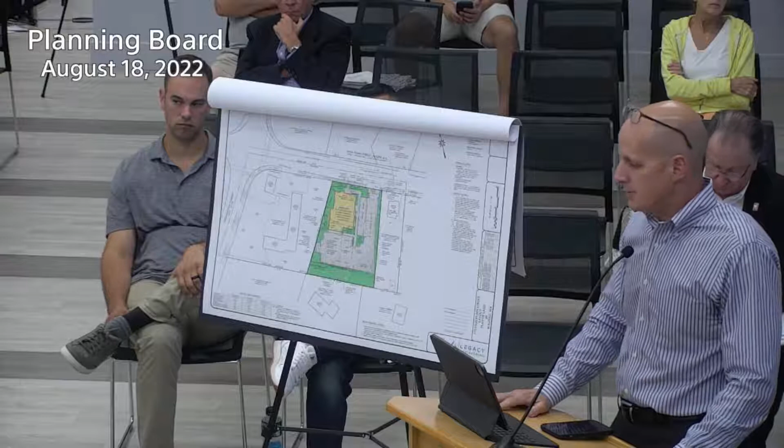Since we were last with you, the applicant has been working back and forth with not only the town engineer but the zoning board of appeals with respect to the special permit to allow 2 floors of residential above. The project has been reduced in scope—it's gone from 10 units down to 8 units, one of which will be an affordable unit.

So the footprint of the building is smaller, the amount of parking is less, and the amount of impervious coverage is reduced. We're down to 25 parking spaces. The general configuration is the same. The big changes we made here were in this corner, for the fire department.

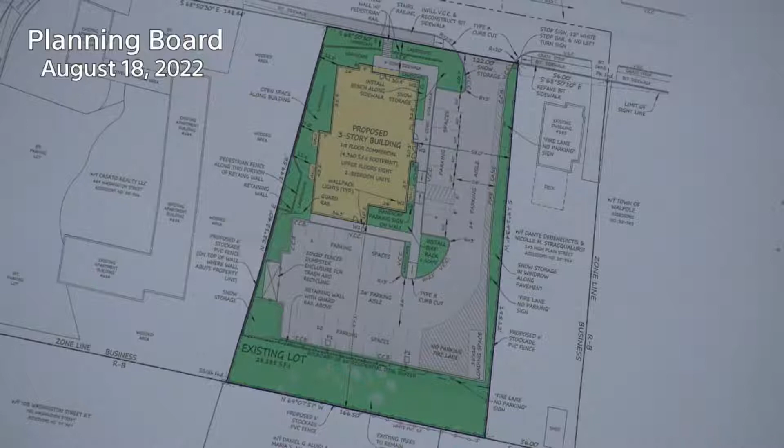We opened this corner up. We have a designated loading space so vehicles coming in for deliveries—Amazon, UPS, whatever—will have ample room in this corner to park and bring their deliveries into the building. There's also room here for a trash truck to turn around, an ambulance to turn around, a police car to turn around, and that was all worked out with the deputy fire chief.

The other changes we made were relative to landscaping. There's been a slight reconfiguration of the area back here, but there's been a significant improvement to our proposed landscaping. These are all green giant arborvitaes, 6 feet on center, with an installation height of 9 to 10 feet. That was specifically requested by the abutter to the rear.

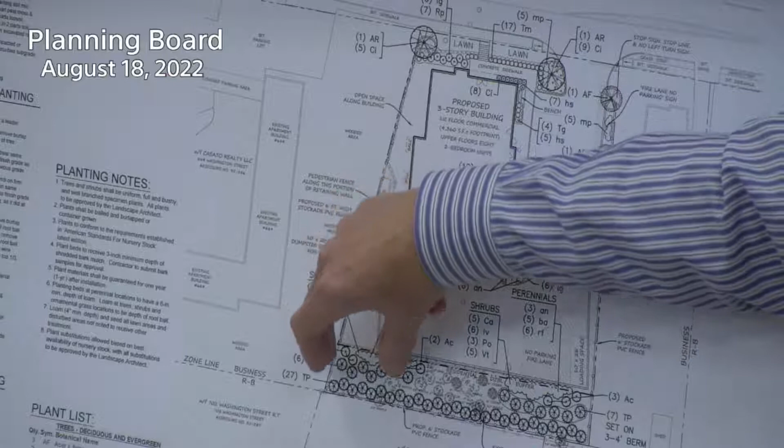There's a whole row here with a group of deciduous trees in the middle, and in the outer areas where we don't have a lot of existing trees, we have a second row of these. We're looking to improve the 26-foot buffer pretty significantly. We've done a number of projects like this, and these really grow in tall and thick, providing a very effective screen.

Everything else was really technical stuff. A couple things we discussed with the town engineer—we would repave the walkway, the sidewalk in front of the property and a little bit beyond. There's a notation about the no left turn.

We did submit to you a traffic study, even though it's not required for this project because it generates too few trips, but the zoning board asked for it. So we did it and provided it to you—the traffic consultant is here if you have any questions. The takeaway is we're not generating a lot of traffic, we have ample sight distance, and we won't have any impact of substance on traffic flows in the area.

The question came up about the no left turn. What we worked out with the zoning board and the town engineer was a note on the plan that calls for a no left turn during specific hours—basically peak morning hours and peak afternoon hours.

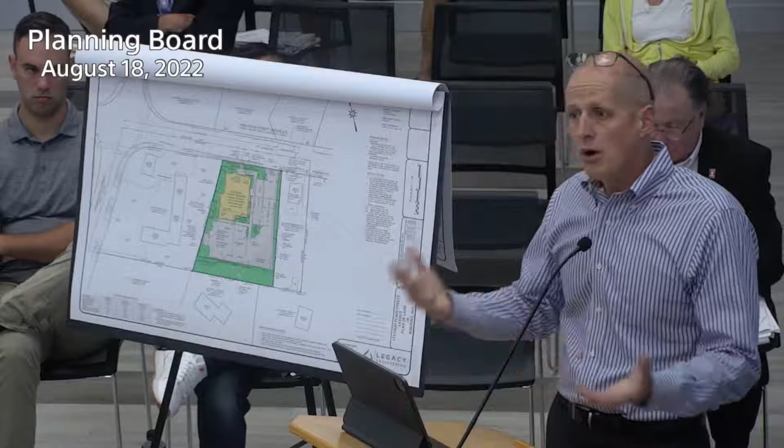There's a subsequent note indicating that those hours can be changed with the consent of the police department and the town engineer. So if they need more, they could do that, and if they decide they don't need it, they could also do that. That would be something town staff can observe after construction and make a decision about.

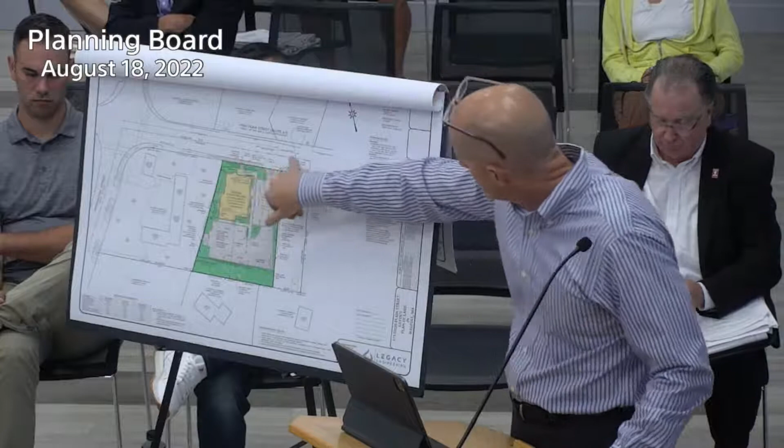The second thing discussed is an idea of doing some restriping, because out here at the driveway is where you start to merge into a left-turn-only lane to go south on Washington. So there's been an idea of restriping that merge area. It's something that would have to be approved by the roadway commissioners, obviously.

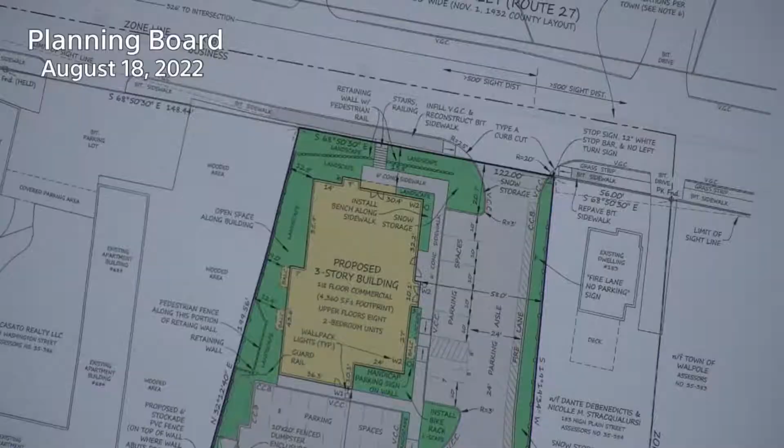The details haven't all been ironed out between our traffic consultant and the town engineer, but the town engineer's preference was that notes be included on the plans and in the zoning decision, which basically say that if the roadway commissioners approve a restriping of that area, the applicant shall do it, subject to approval of the town engineer and the select board. They would decide if that's something they wanted us to do. So those are really the two highlights, and everything else is pretty straightforward.

I'll answer any questions you have while I try to find that document. Okay, John?

The only thing I noticed right off the top is on the layout plan, C3, is that you've got widths of some of the parking spaces but no lengths. They're all 18 and a half. Spaces are to be 9 by 18 and a half except as otherwise noted - is that listed somewhere I missed? Right here, under parking notes.

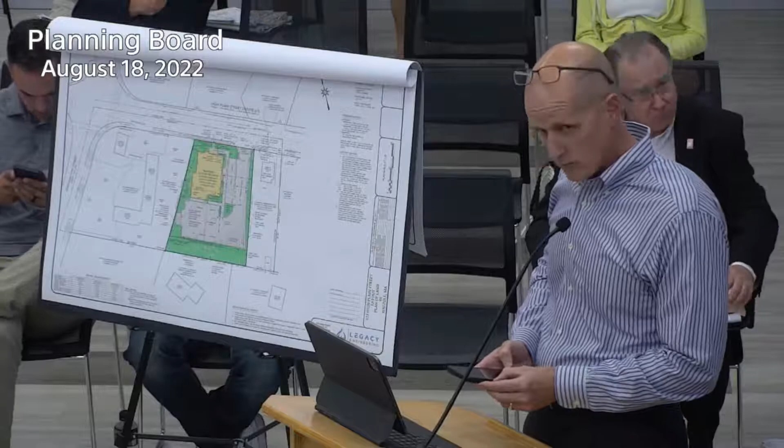Okay. As you come into the driveway to the left of the paved surface, the indication seems to be that area could also be used for snow storage. Is that correct? Correct.

And the no parking area will be striped accordingly? Correct.

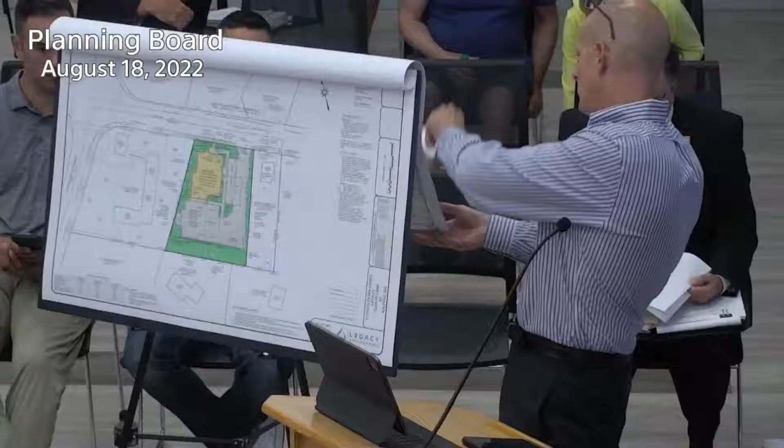And the balconies were only removed on the third floor, so there's still some balconies on the second floor, is that correct? Yeah, the number of balconies is reduced - the balconies were removed on the third floor, so they'll be on the sides of the buildings, 3 balconies on the second floor only, and those are situated towards the back of the building. That decision was because of the height involved with looking back to the neighboring properties - the neighbors asked and the zoning board asked that the third floor balconies be removed.

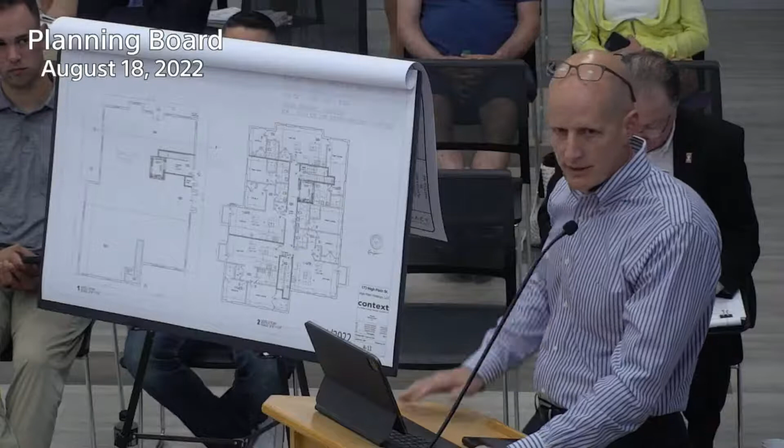So you have that exits - is that entry? Just a question, I don't think it matters. I noted on the floor plans, in the closet, there's like a circle. Is that something new that's needed on floor plans?

I'm just curious, what was the question? There's little rooms that say CL, which I'm assuming means closet, and there's a dashed circle within them - is that just supposed to show it's big enough? I believe so, I'm not sure what it was, but other than that, not an issue.

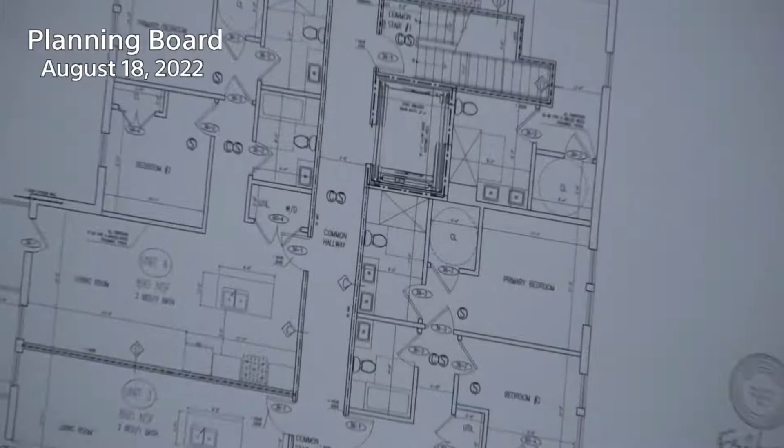Nothing else for me, Jack. Okay, Kate? Can we just revisit the left turn issue? So if I'm not mistaken, the police said they did not want the left turn, but the zoning board...

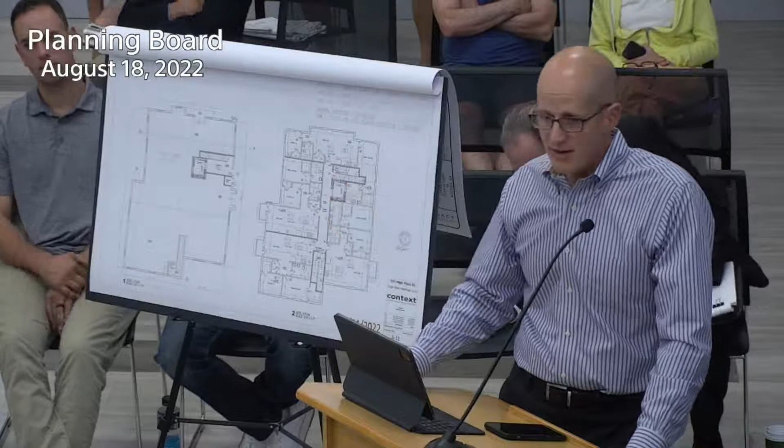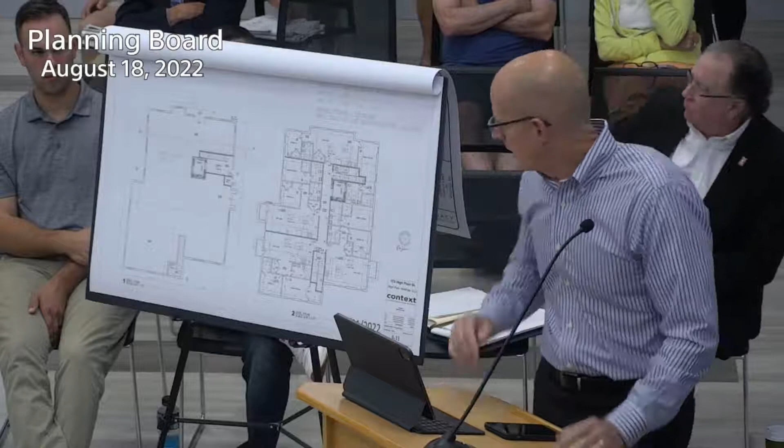I know they did, so I'd put that back on - there's a condition in the zoning board decision, and you can propose a similar condition, with notations on the plan saying that if the police department and the town engineer want to change the no-left-turn configuration, they have the power to do that. And what hours were you proposing? We proposed no left turn.

Six to 9 a.m. and 3 to 6 p.m. Basic traffic time. It's funny they commented to one board and not the other.

The zoning board honestly was kind of back and forth usually on the no left turn sign. I think they ended up being satisfied that they would leave it to the discretion of the town staff so that they could evaluate it. If the facility gets built, they can see what's going on and if they need to impose that, or if they don't need to, they can lift that requirement.

There's pros and cons. They suggest the left turn only be removed. There is no left turn only. So they're not even talking about the same thing.

It's worded funny. He suggested, he didn't want to be over the top, but they don't want a left-hand turn. I think it's a mistake in the wording, because it says we would also suggest that the left turn only be removed. It wasn't a left turn only, it was no left turn. Right, it's no left turn. Yeah, I think that was just a mistake in the wording.

That being said, I understand what he's saying, that if we put a note in there that says the police can take care of it if they don't want it. The way I read it is, there's gonna be a sign that says no left turn between these hours, correct? But when he saw it, he didn't see that. What I'm saying is, if you put the sign up, it means you can take a left turn except for those hours. So basically, you said you can do a left turn. Right, he's saying, I don't want a left turn at all.

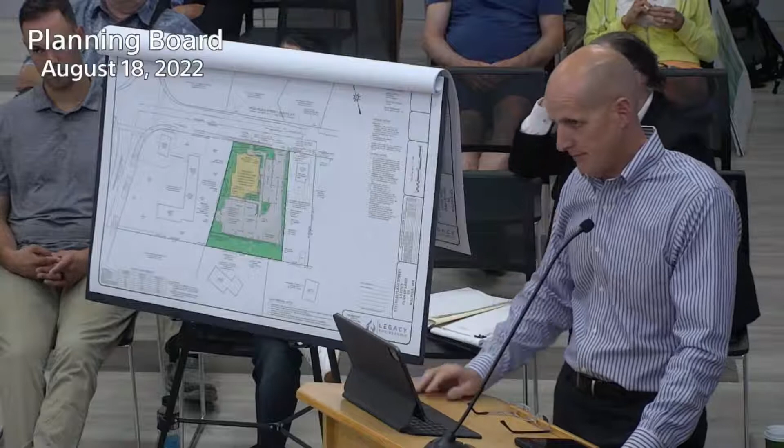And then I know another question that was asked was whether the deck is counted for the area and the setback, and you said you were going to research that. It counts for the setback, and we meet the setbacks on the plan with the deck, but it doesn't count towards the floor area. There's a memo from the building commissioner on that. Yeah, that's what you said you were gonna contact the building commissioner about. That's all I have, thank you.

So I was really happy that the applicant added one affordable and restricted unit, so I think that's great, appreciate that. I have on my comments that we need to see comments from the fire department, so working on that. Just a question, was there a reason that you put stairs at the entrance at 27 and not a ramp?

Well, there's a grade differential to accommodate there, so I'd need to put a ramp there. It would basically eat up all that green space if I did that, which I think would be inferior.

Okay, so do you have a sign letting people know that there's a handicap entrance around the side? And if not, can you add that? Sure.

And then I looked at the ZBA decision, it looks like there's up to 3 businesses, I believe. Correct, and office uses only. Okay, and so does that mean that the handicap accessible entrance will be able to access all the businesses inside?

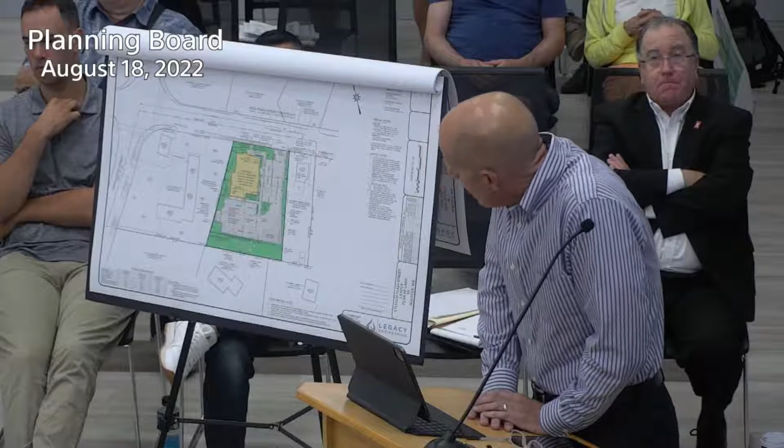Yeah, well, there's only one space required, so we put it in the most central location that we can. Right, I'm just worried that there's a front business that's only accessible from that entrance, which is steps, which a handicapped person can't access.

Sorry, there is two handicap spaces. The layout of the interior office space has not been determined yet, so that's something the building inspector would confirm meets code requirements at the time it's proposed to be fit out. So if he had any concerns about compliance with AAB regulations, that's when it would come up, with respect to the location of those spaces and the office configuration. Okay.

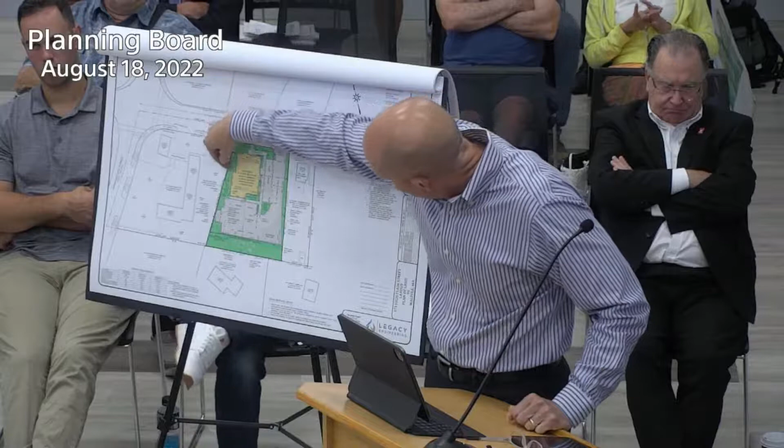Okay, and then just a question, there's a pedestrian fence. Can you just explain what that is? Do you have a detail showing that, or what is that? It's just, there's a retaining wall here. So we have a 6-foot vinyl fence going all the way along the side here, all the way along the back, all the way along the side.

But in this area, we have a knockout where our drainage discharges, and so it's lower. So, given that there may be pedestrians kind of walking around in this general area, we're gonna put a pedestrian rail, which is basically any kind of a fence that complies with the building code, which the building code would require anyways. They haven't determined what kind of fence exactly it would be. It has to be at least, I think, 40 inches tall, and it can't allow anything more than 4 inches of diameter to pass through it, but it could be any number of different kinds of fences that meet the building code. So there would be the pedestrian fence here, and then the 6-foot tall fence behind it. Correct.

Looking at some of our previous minutes, you were discussing whether you would replace the fence along the east side. That's being replaced - the fencing around the property is being replaced, it's gonna be new, okay.

My last question is, I know there's a note saying there's a white stop bar at the entrance/exit, but is that shown on the plans? It is, there's a rectangular line drawn right behind the property line. And there's a sign there, so there's a notation requiring the stop bar, stop sign, and a left turn sign. There's details on the detail sheet for all the signage. Okay, all right, great, that's all, thank you.

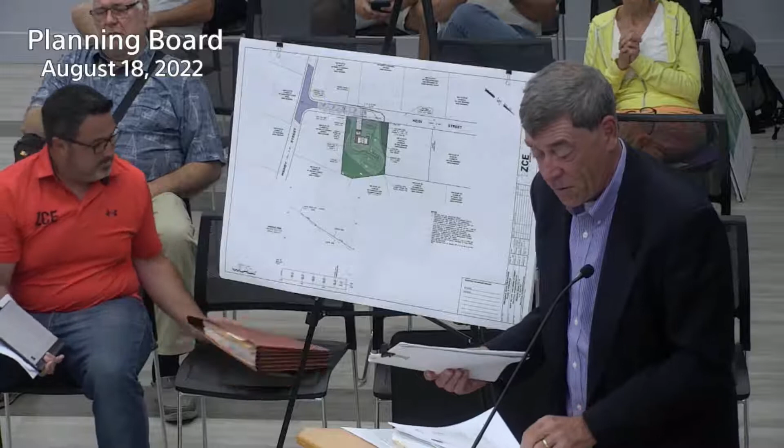So with that being said, now we're open, and Kate has just informed me that all the cards are all here. So I am pleased that we are properly noticed and published, and we're here before you on an application to modify a subdivision that was originally approved in 1970. I think you're aware of essentially what we're trying to do, and I'll just give a very brief background of the context, and then I'm gonna turn it over to Mr. Bissonette. Jamie's gonna review the plan with you and hopefully answer any questions to your satisfaction.

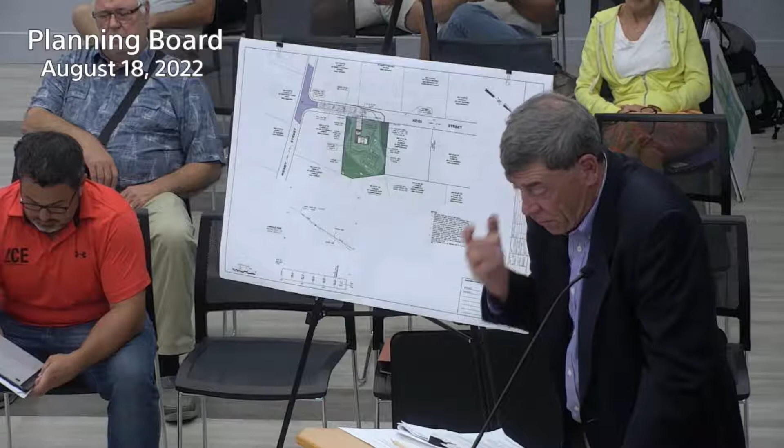Swanee Estates was approved in 1970. A portion of Heidi Street was never fully built out in compliance with the rules and regs in place at the time. Notwithstanding that, there are houses on the corner of Heidi and the intersecting street. For many years, nobody's really taken care of the remainder of Heidi Street nor taken any steps to develop it.

Al has an interest in purchasing one of the lots on Heidi Street for his own purpose. He intends to build a small ranch for himself, his wife, and his family.

Originally, we presented this request in the context of an ANR petition, but the board reviewed it and indicated that was not the appropriate procedural vehicle. They ultimately shared a memo suggesting a subdivision modification is the correct procedural vehicle for us to use. So that's what we have before you tonight.

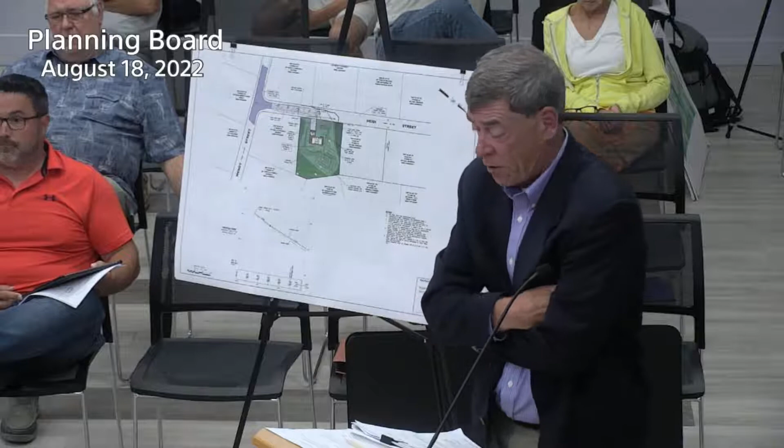Mr. Bissonette will review the proposed improvements to the street in question, talk about the lot and the intentions regarding construction on it, address issues related to ingress and egress, and address some of the comment letters we received just yesterday. So with that said, Jamie Bissonette from Zenith.

Good evening, Jamie Bissonette for the record, from Zenith Consulting. As Lou had said, what we're looking to do is try to access and create frontage for a single lot on a road that was approved back in 1969-1970. This is part of what was a larger 90-lot or so subdivision.

Basically, the existing lot we're trying to access is number 24. We're not looking to change the shape or size of it. We're looking to construct a suitable frontage and access to the lot, trying to minimize overall disturbance.

So what we've done is put the driveway on the left-hand side, as we're looking at here. We're proposing a gravel 20-foot wide roadway with drainage on the side. The intended purpose for this is only for one single-family house.

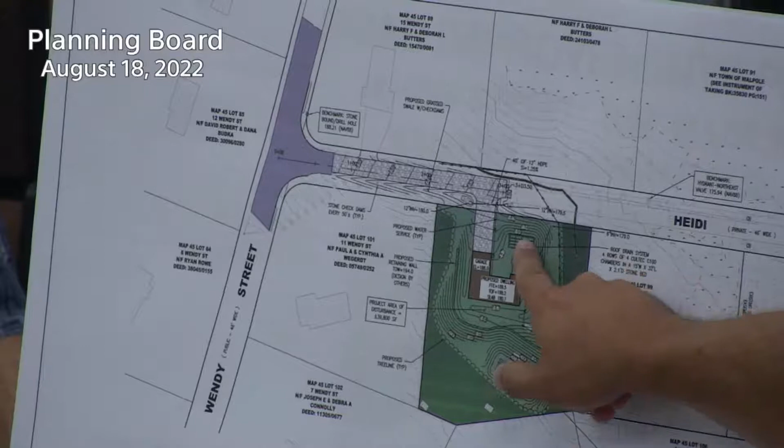Part of our drainage mitigation would be swale check dams and deep infiltration, which we've located in front of the house. We've done perks with the Board of Health and had the site delineated for wetlands. All of our proposed work is greater than 100 feet from the wetland resource areas.

We do know it requires a number of waivers to do the project as proposed. I believe you've received a letter with the waivers listed. We wanted to take a minute to go over the waivers if you have questions, or if you just want to go to the comment letters we received from Kate the other day. We'd be happy to address any questions.

The roadway itself is pretty flat. We're looking to utilize the existing gravel base. There's existing drainage in the road, water, and electricity with poles that run down in wires. What we'd be looking to do is utilize the existing water main on site and also the existing electric. I know the electric department has been down to the site with Al, and they said getting the electric to function for his house would not be an issue.

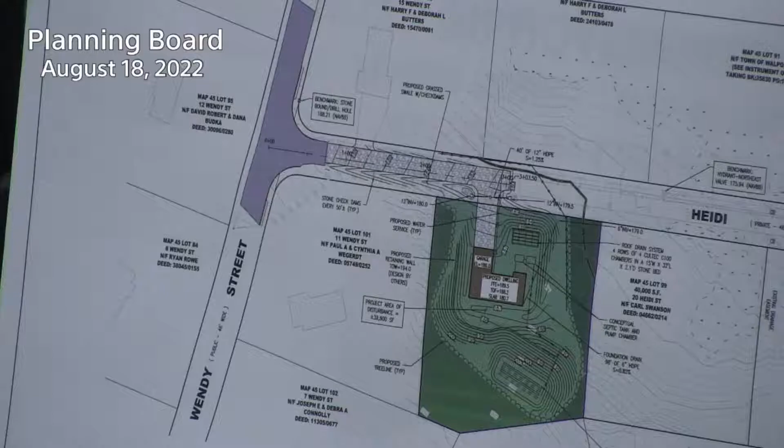I think that covers just about all of it for what's proposed. Again, this is just for a single house. Would you like to go over the waivers, Mr. Chair? Yeah, why don't you do each waiver?

Okay, so we're asking for a waiver from section 4C, requiring a cul-de-sac on a dead-end street. We're also requesting a waiver from 4D, which also requires a cul-de-sac on a temporary or unfinished dead-end street. We're requesting a waiver from section 5-6, A through C, regarding roadway construction; from 5-7 regarding curbing; from 5-8 regarding sidewalks; from 5-9 regarding grass plots; and 5-12 regarding street trees.

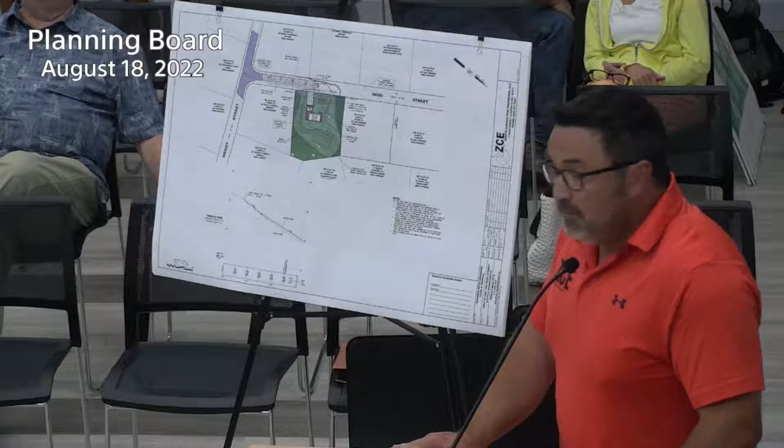The reason for the waivers is we're trying to keep this low impact and for one house. There's really no room to put in a cul-de-sac here. The right-of-way was created and connects all the way through to the other side. If any board members have had a chance to get down there, there's a ton of wetlands that have either come into existence on the site or were there and just weren't necessarily recognized back in early 1970. So what we've done is provided a turnaround utilizing our driveway here for vehicles to come in, back out, turn around, and exit.

And that's part of the reason why we're asking for the waiver for the cul-de-sac, is just lack of ability to provide one.

Okay, alright, any more presentation? Does the waivers do it all for you? That's all. Okay, I'll read the comments we have from the Board of Health dated June 9th. They voted unanimously that they approved the plan, and they want to make sure the septic plan is submitted to them.

Next one is from the Fire Department. They noted, 'we have the following comments.' They don't want to grant 4C regarding the cul-de-sacs. They want to grant unfinished streets. They don't want item 5-6, A through C regarding the roadway construction.

The project proposed to reconstruct the existing gravel roadway while adding a stormwater swale. And the board continues to grant the waivers. We recommend the road improvements, paving, continue down Heidi Street.

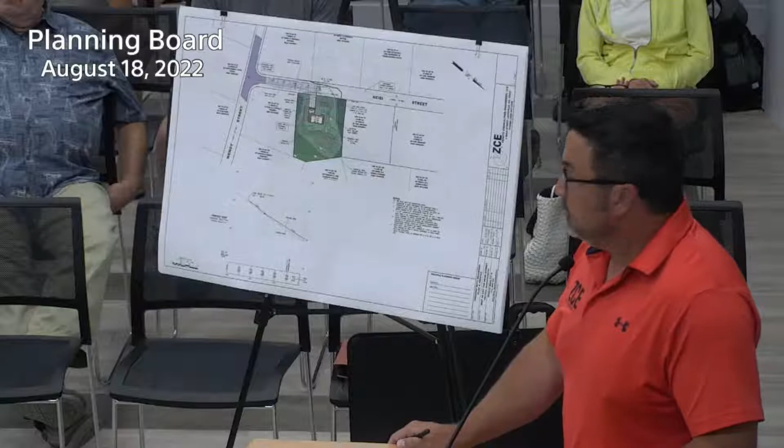And I don't think the radius values are noted at the intersection, so if you could add that—the turn radius coming off of Wendy, going onto the new street. Okay, yep.

And on the plan, what we need to see is the area of the lot, showing that you have the frontage and the setbacks. I couldn't identify that on the plans. You stated what it has to be, but I don't see what you've shown on the particular lot. Sure. On the existing conditions plan, for example, we have a lot area with a frontage and all the bounds around the entire piece. This would be sheet two, ID 3, the existing conditions sheet, right after the cover sheet. Yeah, I don't see it. I'll check that.

And did you submit to us a development impact statement? No, I believe we asked for a waiver on the development impact statement. And I agree with engineering—whatever waivers you're requesting, although I have a feeling you're not going to get all of them, need to be listed on the plans. Yep, not a problem.

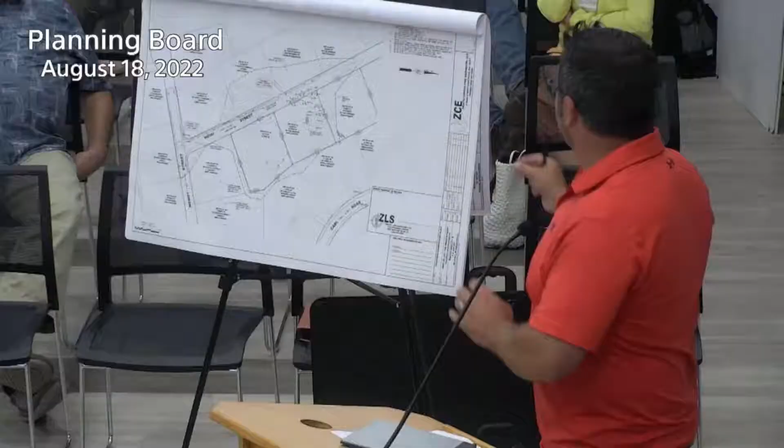I also have a note that I'd like to see comments from sewer and water, and even the building commissioner, if they have something to say about the situation. And then the locus plan on this front sheet is not clear - the photocopy comes out unclear.

If you could change the colors to be more sensitive for black and white copying - the color ones is definitely better. We can hear what the other board members say.

I just want to reiterate Carl's comments and what Sarah said. I have a question on the road - you said there's wetlands now, so if it was wanted to build the road all the way through, could that be done now, or is there wetlands there that would preclude that?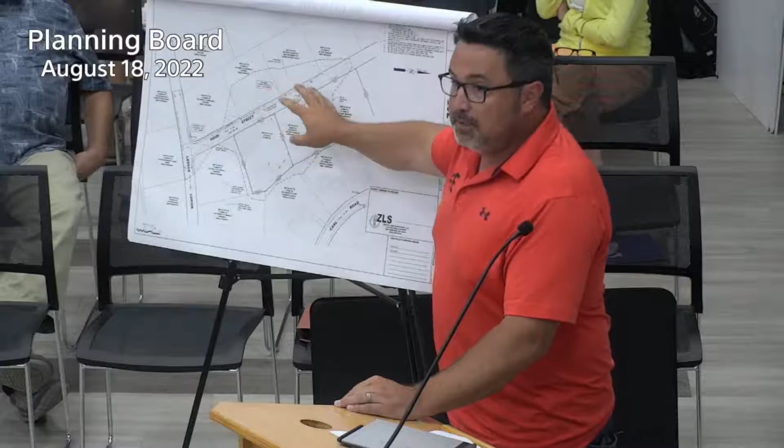We weren't hired to do an analysis on that. I do know, for example, this part of the road right here, the wetlands come right up to the edge of the gravel, based on the wetland delineation that was done. Could it be permitted and completed? I'm sure there are methods to do that, but we didn't analyze that.

So I think the whole issue about paving the road for fire safety is compelling, and as long as the fire department is asking for that, I think it's really mandatory. Now, how that gets engineered - you mentioned a cul-de-sac may not be practical, and the fire department was asking to at least go down to the hydrant. That would need to be resolved working with the fire department on something that really allows that. Their concern is making sure a fire truck can go in there and won't get stuck either getting in or getting out. There's good reasons for having those minimum standards.

I had a lot of other notes, let me just go through. Putting all the variances on the cover sheet, that first page, is very important. And I think on that, first of all, numbering the sheets 1, 2, 3 - it looks like there's C, D, there are a number of letters, which was hard to read, actually.

You'd prefer a numbering system? That's what we usually get, sheet 1, 2, 3, 4 - or if you're gonna do letters, A, B, C, D, E, I think would be better.

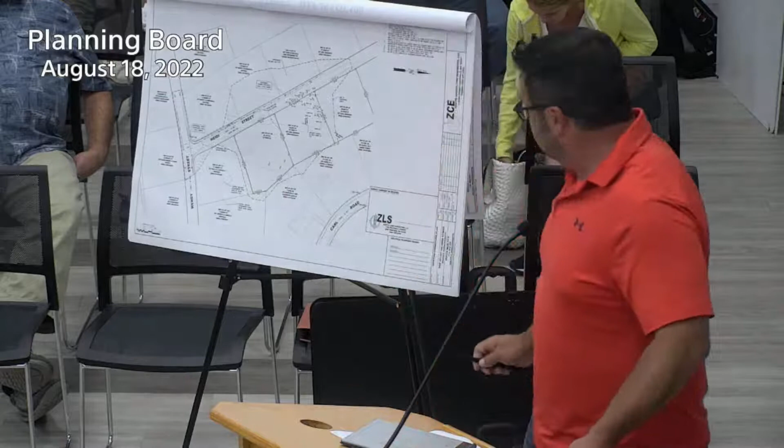Oh, on the layout cover sheet plan? The first one that has details on it - oh, the first one was details. It'd be sheet 2, the second sheet right after the cover. So that would be this existing conditions one. You're not seeing the dimensions?

And then there's a little 200 right there. I may be mistaken about what I was thinking of, so.

I think that's the main thing - understanding how you can meet the fire safety requirements, also having a road that makes sense as far as what gives a minimum amount of roadway for access. It sounds like I need to talk to the fire chief and work with engineering.

I'm good for now. Kate? Basically the same thing - we have a history that we don't vote against public safety, for obvious reasons. So I'm a little disappointed, his comments were from May, and the engineer's comments were June. I was hoping we would have had some improvement by then, but before you come back, you definitely need to meet with both of them.

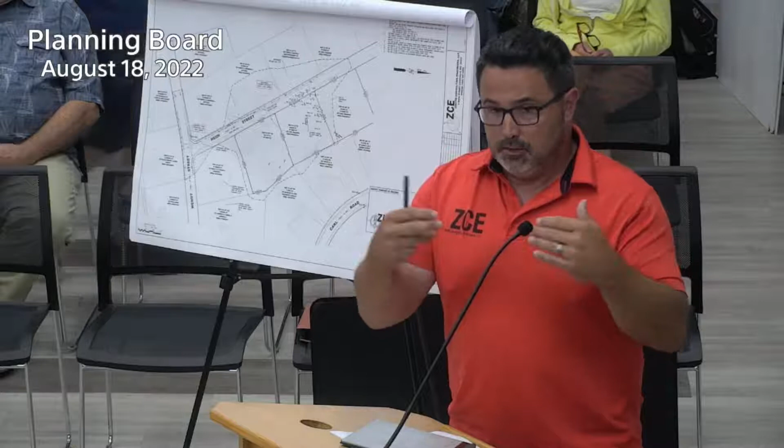Basing it on this little locus map here you have - how much of Heidi Street is developed? Is any of it developed? Not really, when you look at the constructed part, it's pretty much just the throat or entrance up to where the radii stops, the beginning and ending of the street. There's the two houses on either side of the opening that exist.

I think in this case, this house accesses from Wendy. This one does access from Heidi. On the opposite end of Heidi, both houses on Carl Road - are they built out? The two corner house lots are built out, yes. It's pretty vegetated when I drove by there - I stopped at either end, and it's basically woodland in between.

The idea is the fire department doesn't really want a dead-end street there. They want to be able to get in and get out and circle around.

The other lots, do you know if they've been sold off, or are they still owned by the developer? I believe there are a couple lots owned by some abutting owners. For example, the owners of this property here own this lot and possibly this one. Besides that, the rest are owned by the original developer, Carl Swanson originally.

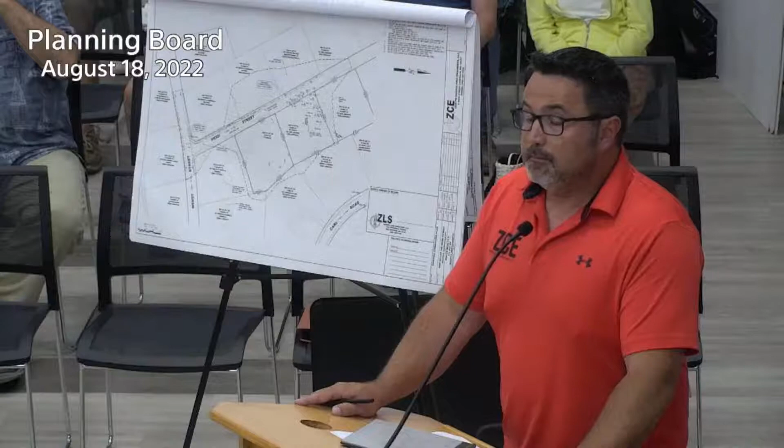Now, since you've been speaking, a couple of my comments have gotten changed, but here's one - you do not show a non-waiver plan, do you? No, I do not. Well, that's one you have to show. We just can't give waivers out because we don't know if you can do it or not.

That's a must, but more importantly, just for you to understand - if you didn't show the non-waiver plan and had the waiver plan, and we didn't grant one waiver, your plan would go. So you need to show everything so that it's yes, no, yes, no, yes, no. So we're gonna need that for next time to show you can do it.

Now, something just came up in the fact that you're saying this is an existing subdivision approved back in '69 for Carl Senior and all that. But it was never bonded, we know that. And we also know that you can't sell lots on a subdivision that isn't bonded. We know that. But if you're saying there are a couple people on the street that have lots there, then therefore it's not a subdivision anymore. Does that make sense?

Well, the original subdivision in '70 was in compliance with rules at the time. Yeah, I understand that, but it was never bonded. Right. So therefore, you either buy the whole thing, or you get a bond, to sell off lots. The rules at the time were primitive, I guess is the word - but we're in 2022, and 50 years later, at the time that wasn't necessarily the procedure.

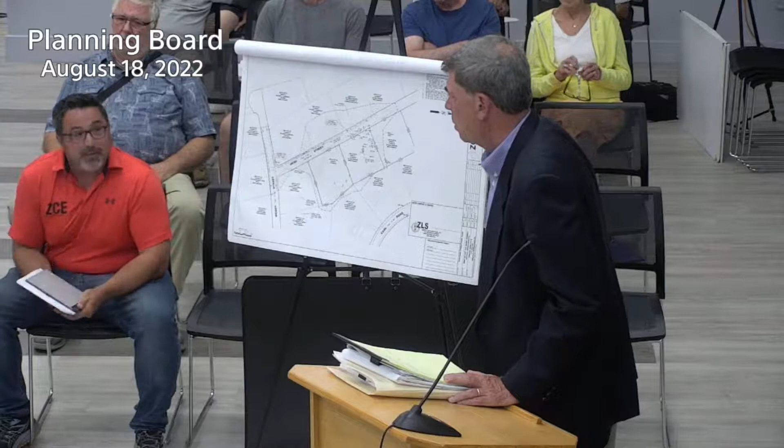And the comments, October 6th. I'll do my best. So we'd request an extension through September 30th. We call it the 14-day rule, because we have people who give us plans the night of. You'd have to have them in at least 14 days in advance, which would be September 1st - that puts a crunch on you. Yeah, and plus you've got to go see the fire chief, Kyle, Conservation, sewer and water.

Well, if it's Conservation, it's easy - they can just write a note, same thing with sewer and water. So if we can't make the 14 days, I'll request a continuance. You can - we can schedule for the 15th, and if you guys aren't ready, you give us a continuance and tell us when you think you'll be ready. But at least if we've got September 30th, we're all covered.

Okay, so we don't need an extension, do we, Kate? No? Okay, we'll pick this meeting up on September 15th at 7:30. Thank you. Let us know ahead of time if you think you're going to get there or not. Remember, you're also going to have all these other departments wanting to review them, and normally they get 35 days, but with revisions and this amount, the less time you give them, the meaner they get. Okay, we'll see you September 15th.

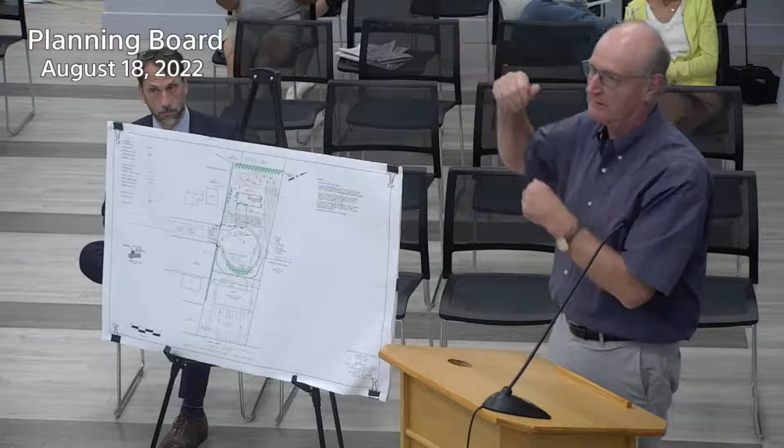I think they submitted a restrictive covenant that may be palatable, but I hear what you're saying. If the board would rather, I don't think I can get all of these trees within the layout of the road, but I can probably get a lot of them, especially the ones between the building and the cul-de-sac. Okay, now you mentioned restrictive covenant, that's all well and good, but who enforces it if they get cut?

So, right, let me just show you the three places. There were the owners of the condominium who asked for this, and so this is one thing we did - you can see there's a little curve here. So we bent the cul-de-sac up a little bit, so it's a little bit farther away from the building.

There was a retaining wall there before that was going to prevent - we could say, oh yeah, we're gonna plant the trees, but probably after a few years they were gonna be a problem with the retaining wall there. So we got rid of the retaining wall, and we're able to plant a double row of green giant arborvitae along that area right there. That was what the owners were asking about.

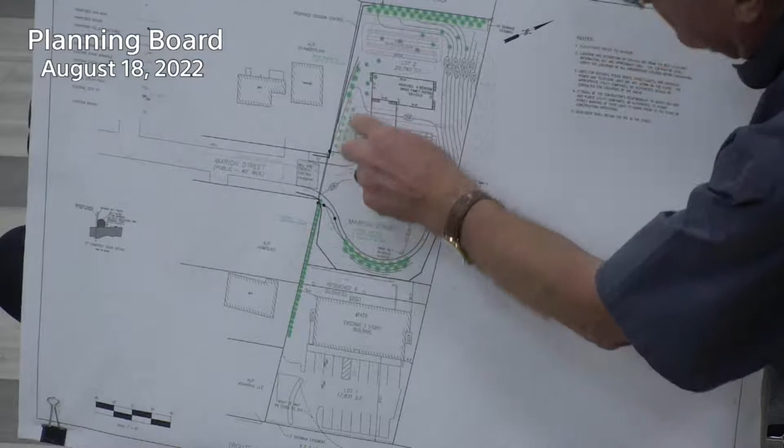The woman to the left here, it shows Ruth Chamberlain, but I know she has since sold that property, that's just how the assessors gave us the abutter name. So there are some existing plantings along here that would remain - we don't really see any reason for those to be removed. And then we showed 4 of the arborvitaes behind those plants. Those I don't believe we could get into the road layout just because of their location.

And then Steve Lynch, who's here in the back, asked for plantings between his property on William Street and the back of this property. So we showed a double row of giant arborvitae across the back. What I've done in other towns - I did it in Westwood, I think some other towns too - is put those in a drain easement. In the drain easement, there's no actual drainage there, but the advantage of a drain easement is we can put conditions in there that say you've got a drainage easement, you can't cut any trees, you've gotta maintain the trees, this and that.

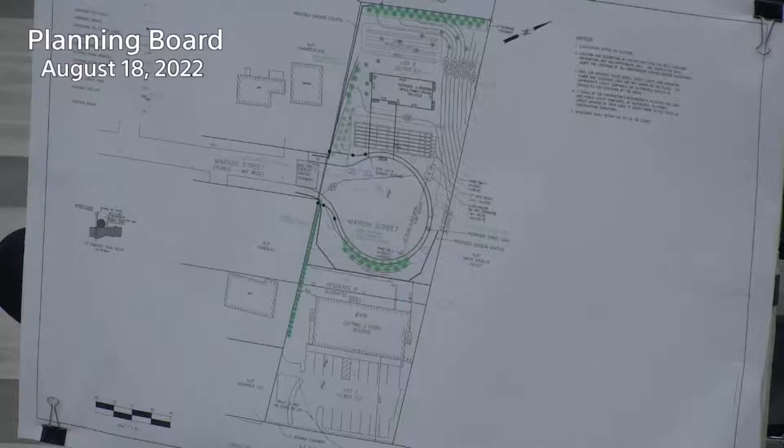There's that typical language that goes within these easements that says if you cut down the trees, the town has the ability to go in there and plant the trees and charge you for it. There's some documents you guys have accepted in the past, maybe not this board, but the chairman has seen those, that can be effective to make sure the plantings stay.

So that's why I did it the way I did, and that's why I didn't submit after I thought about it. It was getting late with the two weeks and all that, and we were rushing to do it, and I'm saying, I know there's gonna be mistakes on these plans anyway, so let's just get this out of the way. It seemed to me that this is the sort of thing that needs to be resolved with the abutters.

The abutters have all said they're not against this house. I think the town officials have all said they're not against putting the cul-de-sac there, and in fact it's sort of an improvement to the town. We've talked about that. So now it's just how can we keep the abutters pleased with the proposal, but because it's a subdivision and a single lot, and there's rules and regulations and laws that control this, how can we work that out so everybody's happy?

I'm not the one who knows all about this stuff. I can only tell you in the past, and I can't even tell you how successful those things were, but we did do them with drain easements and put that same language that's often in the drain easements to the town of Walpole and other towns.

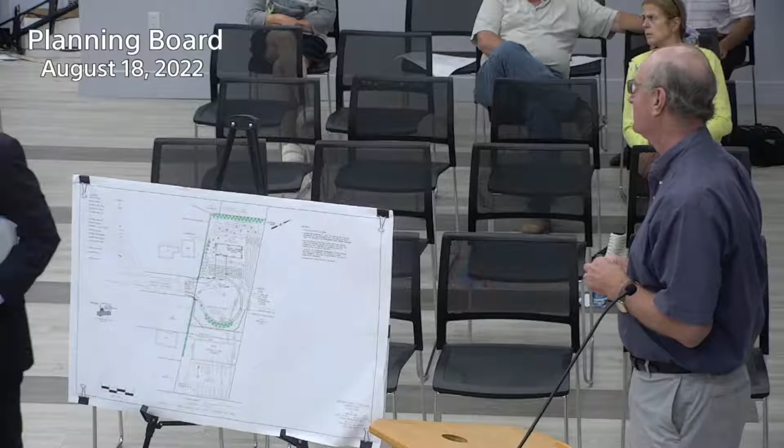I didn't mean to digress from where we are, but I just wanted you to take that up at the end when we finish this discussion.

Okay, Sarah? I think it's a good idea, next to the Lynch property, but can you say again, are you able to do it against the other abutting property? Well, we can extend that drainage easement down the side here, right? Because we've got a 15-foot side yard requirement anyway, so that really doesn't bother anybody. I think a 10-foot easement along this side is possible.

I think we had talked about this at the last meeting, about maybe squaring off the cul-de-sac, not the pavement, but the layout of it. We can try to include as many of those shrubs within the layout as possible, and then anything that's outside of it, we can use the drainage easement. So does that make sense to you, John?

Sure. So, Mr. Chair, Jonathan Silverstein. Could you go to the microphone so people can watch yourself on YouTube tomorrow? Look forward to doing that. Jonathan Silverstein for the applicant.

So we had proposed to the abutters that we would enter into a declaration of restrictive covenants that would be to their benefit, enforceable by them. I think we're agnostic if the board's more comfortable having some sort of drainage easement that's enforceable by the town, that's fine. I don't know what would make the abutters feel more protected, if they have the ability privately to enforce it or if the town does. We're fine either way. Obviously, the intent is to make sure that those are protected, so it's whatever the board's comfortable with.

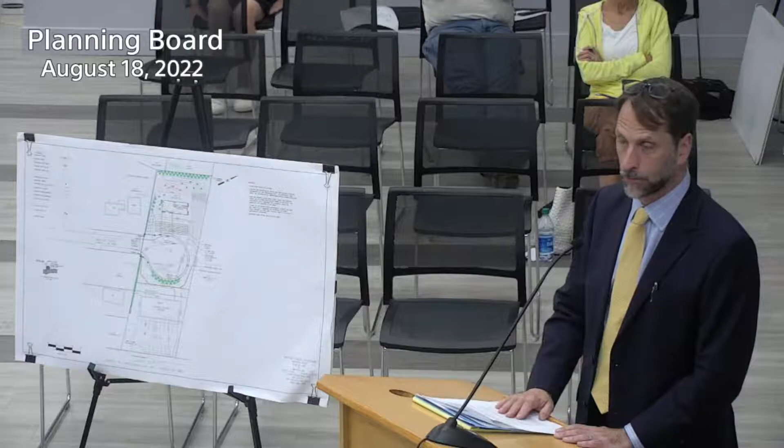Okay, so my view is this is protection of the abutters. I'm not gonna speak for them or however they wanna do it. I'd ask that when you meet with them, explain both ways, and let them hopefully all agree the same on a drainage easement, but explain to them the pluses and minuses. If it was me, I want the town to do it, I don't wanna deal with it. The guy who just cut down the trees is not gonna be amenable to talk to, is he? Probably not. So you're better off just going bang, bang down to the administrator's office, saying, I want my trees back. But if you explain that to him, whichever way, I don't think anybody up here cares, as long as everybody understands and it works. Either or. Okay, we will do that.

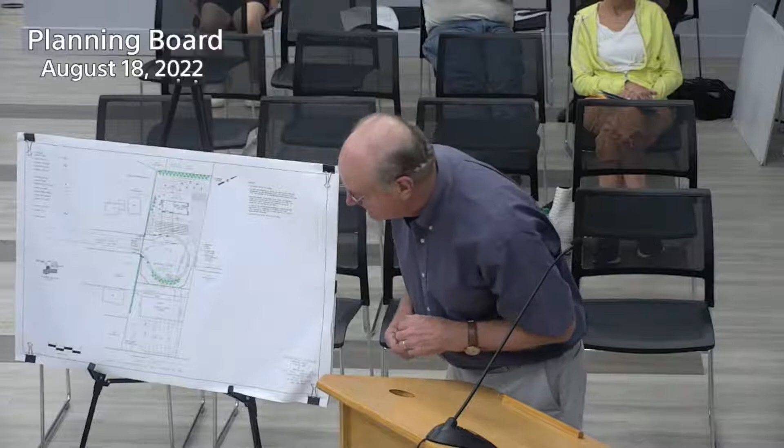I have a question. On the trees next to the cul-de-sac, at what elevation are those? Are they up at the road elevation, or are they more down? So the row that's nearest to the street is gonna be at the elevation of the street, the other ones are down maybe a couple feet below that. Okay, so from that 1429, they'll kind of see like a hill of trees, if you will, like two rows.

Those trees, I think, grow to about 30 feet or so, they get pretty big, and they grow fairly rapidly for a cedar tree, essentially, is what they are. Compared to a regular cedar tree, which grows very slowly, they grow fairly rapidly. They're fairly popular, we get a lot of requests for that species of tree in size.

As the chair said, I would just be interested in what the abutters would like, but I think whatever you do for one side, you should do for the other. I just failed to think about the other ones, but they should all be somehow either in a covenant or in an easement, or maybe both, so that there will be something enforceable, that should somebody cut them down, that they can be replaced.

Okay, so that's what you want to talk to us about this, correct? That's really all, as far as we can go with the Marion Street, right? That's really all I wanted to bring.

Okay, just trying to move along. I'm gonna have to go back and cross your name off all those little letterheads I got. They stopped putting all the names on the letterheads when we got to like 35. Oh, I got some back 25 years.

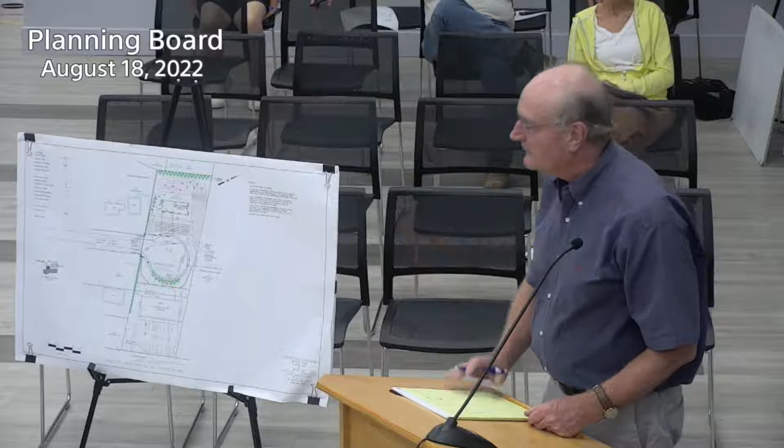So you're all set here, so we're gonna continue this, correct, John? Yeah, I think we continue it for a month, and in 2 weeks we're gonna have revised plans into you. Like I said, these plans have already been done. Takes you 2 weeks to come back? Takes you 2 weeks to drive down? No, but there's some things now that aren't done, right?

I failed to show those. But before I move on, because we still got it open, do any of the abutters or people want to say anything about the Marion Street plants, how he's proposed them? Well, I'm on Marion Street, so maybe.

Does that have to do with the planting that I just received? Come on up. You're on fire. I just received this plan, this is the first I've talked to, seen it. We've seen it too. On May 19th, I did submit a different screening plan that I think you all got a chance to review.

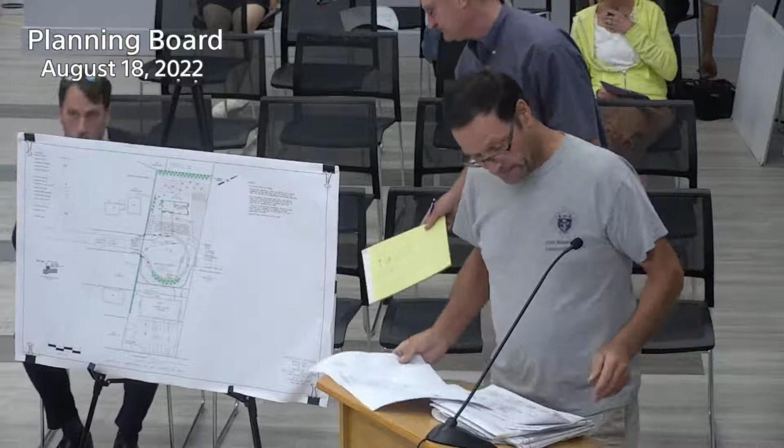My name is Steve Lynch, I live at 80 William Street. The other screening plan has a 30-foot buffer zone back there. This new one has a 10-foot easement, which I'm not sure what an easement is, and again, my concern is, if it is subdivided, the landowner that you've already discussed, how does it protect us? I don't want to be out there policing trees. That's my concern, that it doesn't have the number of trees, what type of trees, so there's still a little concern on what is being done on the property.

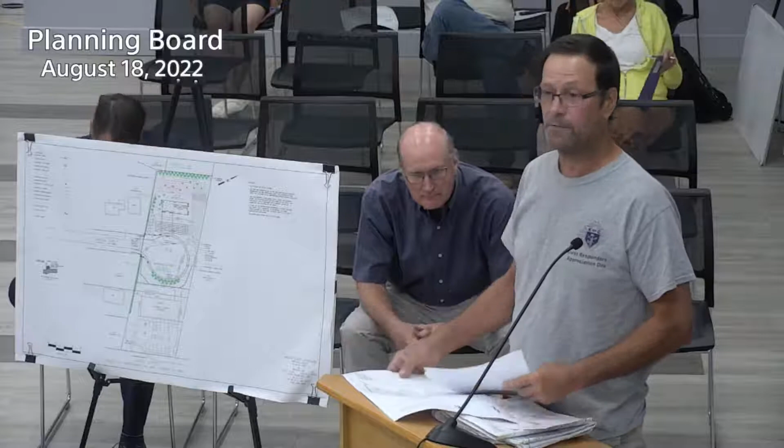Okay, he's not opposed to a house. What he's actually doing is not required by us. All we require is a street tree every 50 feet. What they seem to do is proposing more against your property. And what we just discussed is, if it's private property, the guy could come and go right to the line. What's the protection?

They said they can do one where you guys get some restrictive covenant against the neighbor who cuts it down, but then that becomes you to go sue him. Another way, what John had suggested, is you do it as a drainage easement, because the town has those all the time. So if anything happens to it, say they cut the trees down, it's against the town, not necessarily you people. So you guys just call up Jim Johnson and say, Jim, where are my trees? You gotta put them back, because it's a town issue. So it will be the town taking action against the person who cut them down, not you guys. So basically, it's the town's expense if they get cut.

Yeah, it's just a couple of questions I have on the amount of trees and what's going there and stuff like that. Again, I'm not opposed to any project going on back there, but that's my concern, the easement they're speaking about. I asked Jonathan to explain it to you guys so you understand, in a meeting, but if it was me, what would the town do if a guy cuts them down? Well, that's the way I feel.

Yeah, I don't love these trees, I really don't, but I don't want to see the trees disappear. And you don't want to be sitting there having to fire up an attorney just to take the guy to court, that could last forever and cost you 10 grand for 2 trees or something.

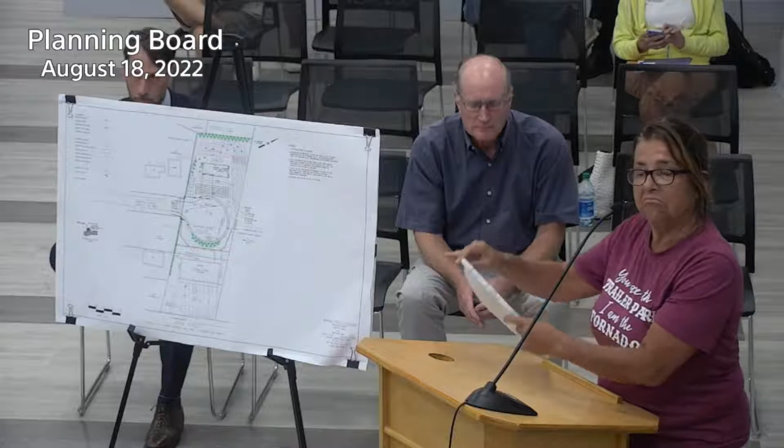Not against the house, just privacy and enough drainage. Now the question is, what he's proposing, the plants for you - is it on your property or his? Mine.

All right, because Mr. Gloss or Mr. Silverstein, how would we resolve this to make sure it does happen? We didn't know about this separate agreement. It was a poolside agreement, John, you gotta stay with these guys.

So can I just ask while she's here - so there's existing plantings here, which we're not going to remove, and we're going to add 4 of the giant arborvitae. Would you rather see something else? Well, there's spruces right there, right? So if, right here - we're originally showing 4 more.

Oh, there's my - nice to see you. Glad you get out of the backyard. I promised you I'd put these trees up, right?

Yep, but he put them on our land, on the land for the spot. You want me to put them on your land? Yep, I do, because the other person can cut them down. I want them right on my retaining wall - these 5, 4 trees right here.

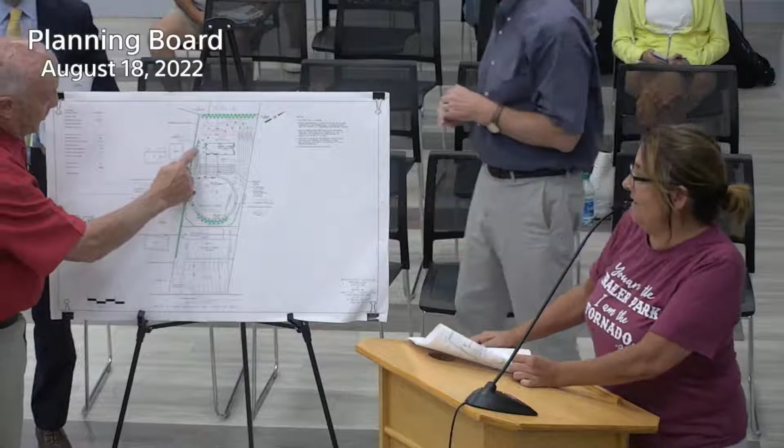Well, you already have the spruces right there - some separate, yeah, these little shorties here, yeah. We can rip those out and put the arborvitaes right there, on your side. Okay, I have no problem.

Well, it's a great thing when you have a poolside agreement. I'm glad I got you out of your own property.

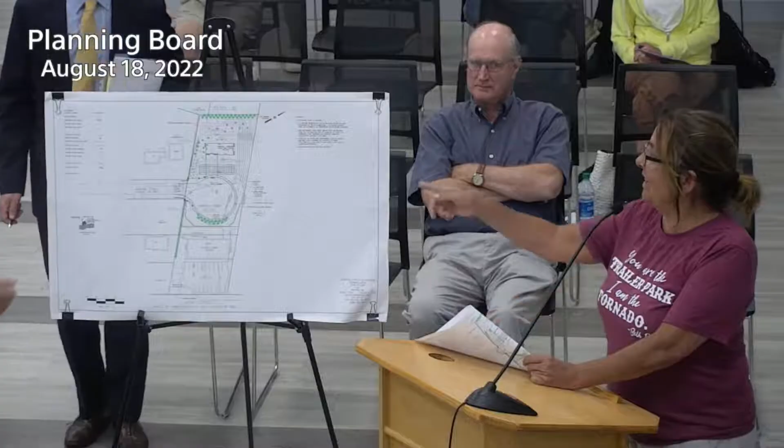Okay, well, I'm gonna - call it, thank you. Whoa, ma'am, we're not done yet. I'm gonna tell you the downside.

If something isn't written in the agreement, it can't get into our decision - we have no power over it. So if he never does it, then you've got to go after him personally. Oh, that's no problem.

I'm that kind of girl. Okay. So, I have my moments when I can be a little nasty.

Then John, you'll have to redo your plan on how they're gonna do theirs. We're not taking down those existing ones. Oh no, whatever's there, you don't have to take down. If you're adding these, that's fine. Okay, they have their agreement. Yeah, that's all what I'm saying too.

Now that the Japanese knotweed was brought up, I want to say a concern I have. It's now growing within 100 feet of my septic system, and I think we know that needs sun, dirt, and water. We're in a drought, but I'm pretty sure that stuff is close to my leaching field. It's on my property, it wasn't there before, so I am more concerned about my septic system than the trees, the house, and everything else. I don't know how we go about that.

To be candid here, we don't control vegetation. We've been trying to help you guys all along, but there's nothing in subdivision control that can do anything for us. I would suggest you talk to someone at the Board of Health, because they must know how to stop this, or it must happen a lot of places. And then if you get that in agreement, if it's a simple thing for them to sign off, however you wanna do it.

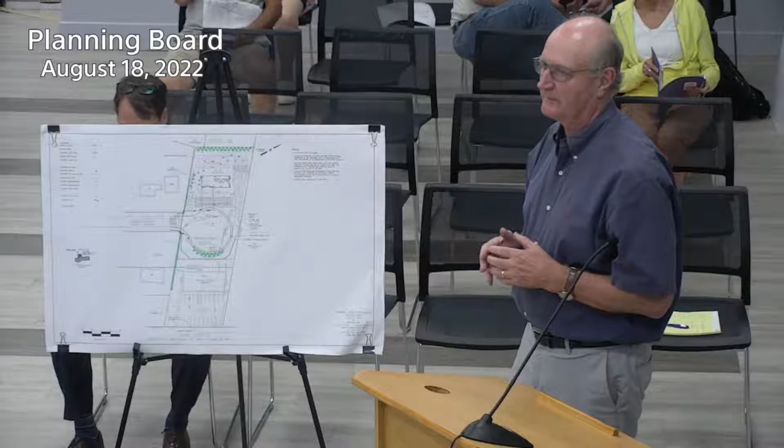Okay, all right, so we're gonna follow what we talked about as far as the plantings. You're hardly gonna notice it, but there's a slight change in the cul-de-sac, and we will include your suggestion to change the configuration to try to include as many of those trees within the right of way as possible. The list of waivers will be slightly modified to include those changes, because it's not going to be your conventional cul-de-sac.

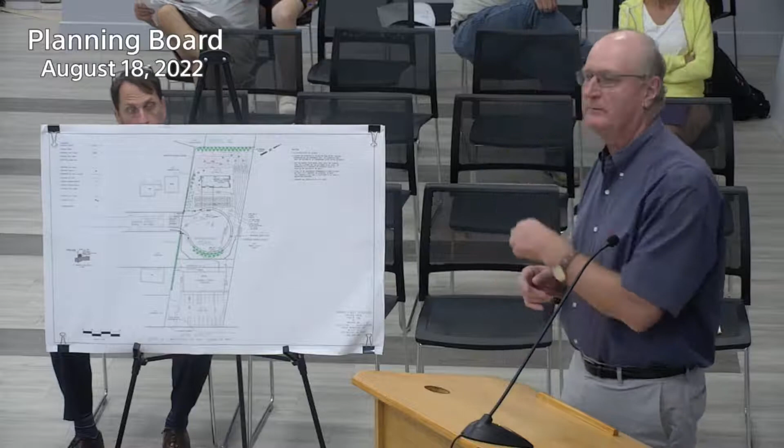But you're gonna show us a non-waivered version, right? We brought one in once before. I don't know if anybody really had a chance to look at it. No, but we need it, John, as you heard before—just bring it in, in case. If you get them all, you're all set. If you miss one, you don't want to be sitting there.

Yeah, okay, and then the other thing is at the last meeting, about the sewer and water, they were looking for some sort of easement, but it's just impossible to do that at this point. They needed to ask for that when John did the site plan. What do they want, an easement for what? I have no idea. They own more easements than there is land in this town, and they don't use any of them. You were part of that back in the old days, John. I was an easement guy. Yes, easement king. Okay.

So we're all set. We're not going to do any testimony, we just opened it because we're discussing the subdivision. It's all tied together, so we're going to continue them both.

I think this was very helpful, because rather than coming in with a whole bunch of plans and a dog and pony show without having this agreement, now I think we're all in agreement as far as where we're going to put the plantings, what type they'll be, and how we'll make sure they're bonded so we know they get planted, and then how we'll protect them so they remain.

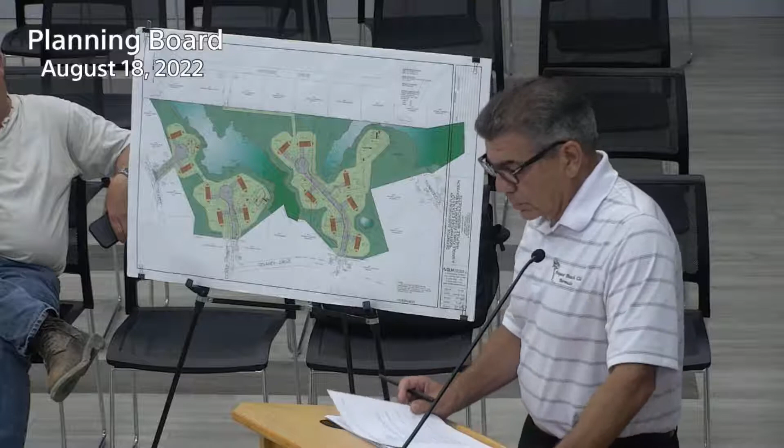In addition, we've designed this project with no waivers as far as layout, roadway widths, pavements, cul-de-sac lengths, etc. We are requesting, which we put in the letter, waivers for the cul-de-sac coming in off High Street. I'm going to show you the waiver plan that we put in there with supplemental sheet A and the cul-de-sac.

On the waiver plan, what we would do is provide one house, eliminating one of the lots in lieu of the board granting the waivers. We would have a single driveway that would come into that one house. We would ask for a waiver to reduce the road down to 12 feet, a waiver for it to remain private, and a waiver for any curbing.

Pretty much, I have a whole list of waivers here - there's about 9 of them that go through the whole gamut of waivers to allow that to be a private way and a single driveway to one house lot.

The utilities would stay the same. The water line loop would still continue up through that area out to High Street. The sewer would do the same, coming up into that cul-de-sac and up to High Street as well. We would combine the two lots into one large lot - just a little over 3 acres. It would be one single lot, if the board saw fit to grant the waivers.

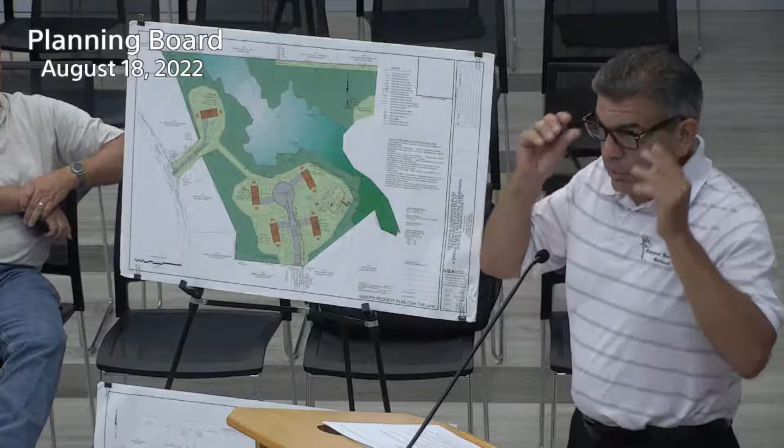If not, we would just continue as a full subdivision road and do the two house lots. The feeling is, and the justification for Mr. Walsh, is that if you waive it, he doesn't have to build the road. It's probably a wash, build the road, lose a lot. So it's probably a break-even proposition for him.

So if it was waived, we think it's a good plan to waive it. It reduces the impacts on High Street. There's only one house coming out, it's basically a driveway. There's not two houses. We still bring the utilities through, so the town gets the utility connections through that area, and it would just be a waiver.

It would also reduce runoff for the site, the impervious surfaces. We would reduce the drainage basin. Right now I'm not showing a basin, and that's partly the reason we continued the conservation hearing so far out - if the board sees fit to grant the waiver, that would change our drainage design and also change the impacts around the wetlands in that area. So the commission would be in favor of the waiver, obviously, because it's going to reduce impervious areas and work within the buffer zone. It's one less house in the buffer zone, driveway, et cetera.

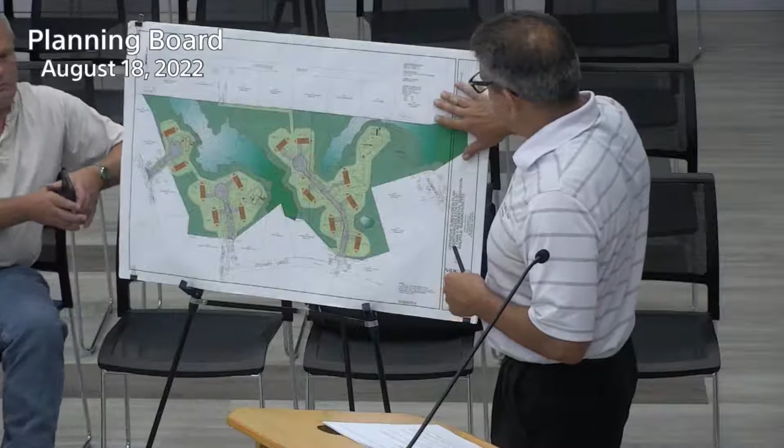We have two main drainage basins. There's one down the back, which would handle this cul-de-sac and the homes in that area. And then we have one over here on lot 2, which primarily handles that small cul-de-sac. And then if we have to build a subdivision, there'll be a third one here. If we do go with the waiver plan, we haven't designed it yet, but we would modify this to have probably a swale down the driveway with a small sediment basin right there. We talked to the commission about that. So we just pick up the runoff from the driveway.

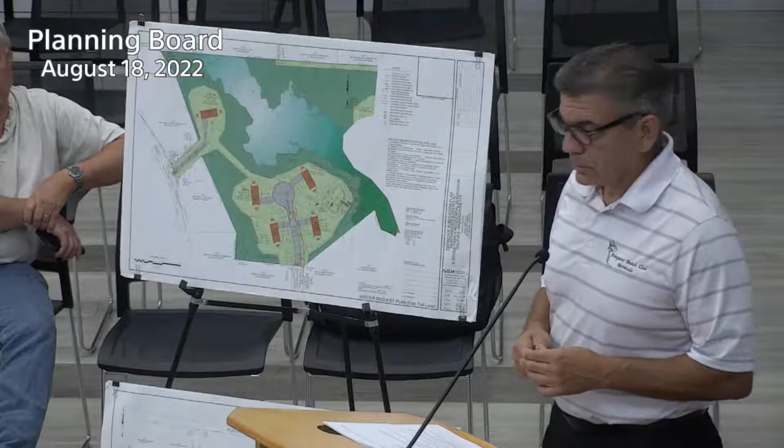I'll address that, the waiver. Chances are you're gonna have to do what's been done on all these private roads. Whatever's been done, they're gonna want, and it usually starts with Deputy Chief Paul Barry. 12 feet hasn't cut it yet, I don't believe. He hasn't what? Paul Barry, Deputy Chief. Yeah, right, I know. What was your second comment? These have been done all over town, the privates, but 12 feet ain't gonna cut it, I can tell you that right now. It's usually more than that. Even if it's just one house?

Over there, you go see that guy. We'll go see him, with the fire engines, right? He's the one, comes down to him. I'll go see Rob. He's the one that - no, I agree, I understand. Yep, so from my - you don't have comments from him on the project yet, do you?

Let's see, I did - nope, no comments, not yet. Not yet, no, not the ones I got. So, just anytime we've done these private roads, he typically - well, in the past Maggie and now Kyle chimes in - but typically that's for today? That's July 8th. Okay, how come I don't have it in my little packet? I'll share, I think he commented on the waiver. I got - oh, I'm two, sorry, I found it - got one from Tim Bailey and one from Paul Barry.

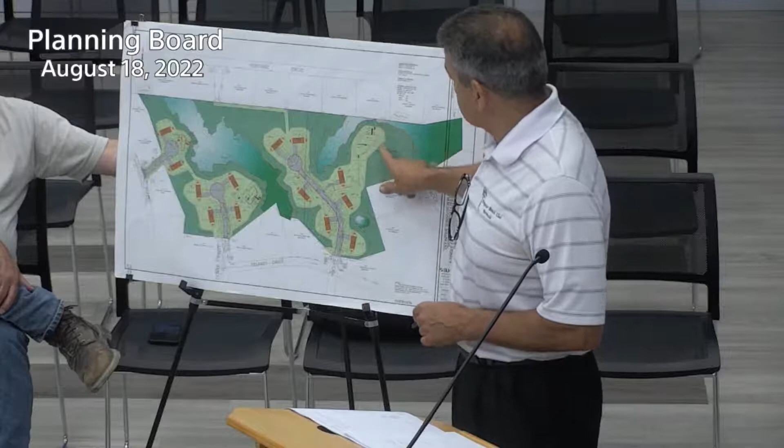Yeah, this is the other one he wants cleared. The sewer easement right now goes through here. Some of it's clear, you can see it, but it's pretty overgrown. And there's no easement around it. I don't know why it never got an easement, the town never took it for some reason years ago. I don't know, it just got left off.

But it's just gonna stop at the property line, right? Yeah, well the sewer comes from Heritage down through here on the side drive. Oh, I got you. And there's no easement on this portion of the sewer across our property. There was never an easement put in place years ago. Really? Who built that road? I don't know.

And the only other thing I'll say is, if they're comfortable with it, I'd love to hear at the end from the neighbors who are here about how they feel about whether that's one or two. I think she's right here - I just, because I assume it's a better thing, but I'd love to hear from those who live there. That's all I have.

Okay, Phil? On sheet one, if we could label parcel B on sheet one for the locus, that might help. On that little piece? Well, I don't know how you can do that. I mean, everything's drawn, you can't really see it there. Yeah, I could try. Or an arrow could see something.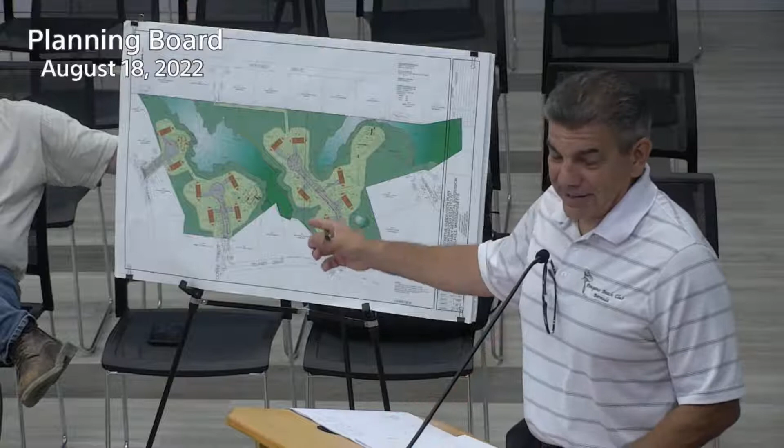So we talked about, we would come around that. So right now, parcel A would be owned by John, he would retain that ownership, unless something is done with it later on.

And then on sheet 6, so you're connecting the two cul-de-sacs, the two water lines, sewer lines, so that's good. Yeah, they're gonna come all the way up to High Street.

And on sheet 7, so it looks like the water flows north - northeast, it looks like - towards parcel A from the cul-de-sac. The surface flow, yes it does. I'm just looking at the elevation of the land there - it goes down into that wetland.

But then you're just collecting it in the drainage, and it just seeps into the ground. Some will seep in, some will overflow - there's an outlet structure, and that would go into the wetland. The idea is to mitigate it, so you slow it down, infiltrate as much as you can, and slow down the rate so it comes out at a slower pace.

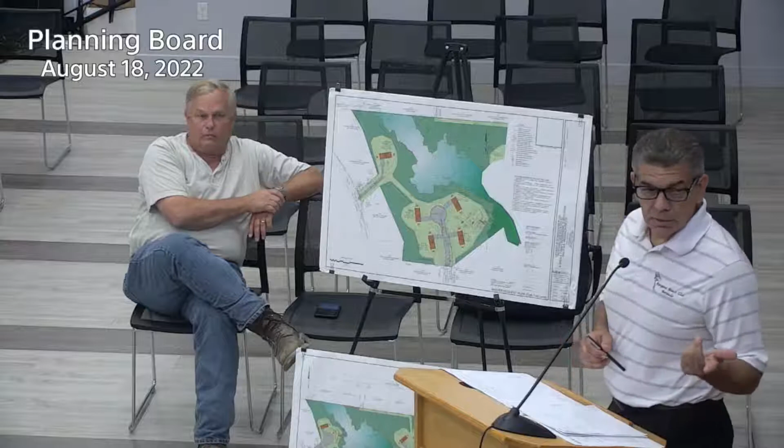All right, the other thing, just looking at the tie-ins, I assume there's nothing on High Street you're gonna have to tap into, correct? Water line. Oh, that's right, the sewer you're running through there, okay. And he made a comment whether it was gonna be tapping sleeve and gates, or all three gates, or we'll ask, I guess we gotta, when you go to construct it, water will tell us what they want. But these are days Maggie's not here, usually she has you pave curb to curb or whatever.

I don't see the details of that on there. You guys gonna have something for High Street? Yeah, I mean, I don't know where the water line is. Is it on the edge or is it in the middle? Exactly, I mean, I show it, he had a plan of it, looks like it was on our side somewhat.

The same thing, how about down in Dover Extension? You didn't run the pipes, oh, you did? I don't need to do anything down here. Cap them? All right, he's asking for some stuff down there, asking for some common potholes to be fixed on Dover.

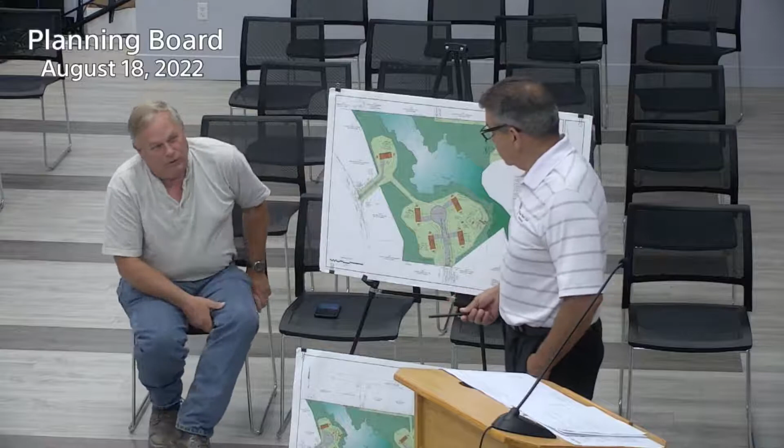Yeah, no, I don't care about potholes, they got enough guys and trucks. The water and sewer come into the property. All right, so you don't have to go out there.

All right, how about the other end, like Delaney, and the other one too? Okay, yeah, no, but he wants to pave it right from the curb line. He wants us to pave it down here, I think is what the comment said. It's a town property. We'll go up to meet.

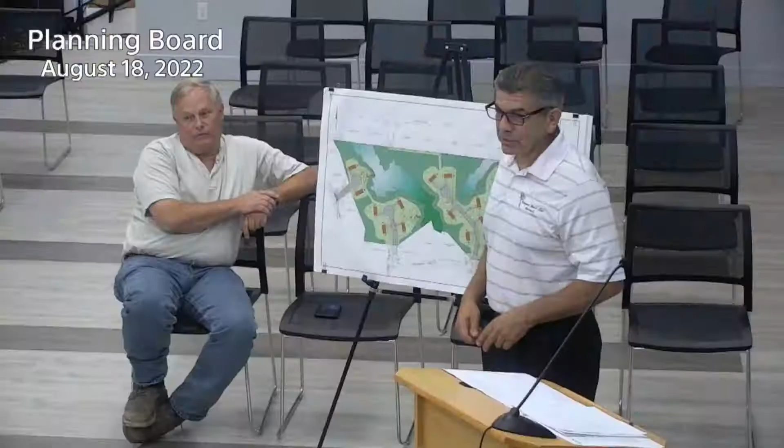Another change order? We'll do that to make it look the same. How about on the other part down at Delaney, do you wanna do the same thing? Probably overlay that out to the intersection. All right, it's only a short piece.

Change on it. Get off your phone when I'm talking. I'll make you pave the whole Delaney. My wife. Jesus. I'm wondering where he is, he's been out so late.

Okay, my only comment is you gotta go talk to Deputy Chief Paul Barry on how he wants it, and once you get that figured out, then it works into your drainage and everything else. We've done it with, what's his name off of 109. He did it to us on Pemberton, now that you mention it. Yeah, he kinda made that a little more than we needed, but there's been a bunch.

You've never done one in Walpole like that? Not in a while, just the Pemberton one was the last one. Because we've had a bunch of these. Yeah, he goes by that new code, those new regulations that are out. Before, I don't think we ever hit 20 feet, but that's what he wants, so it's the only way he's gonna go with it. Also, when you give the plan, make sure you show him it's the 750 feet or 720.

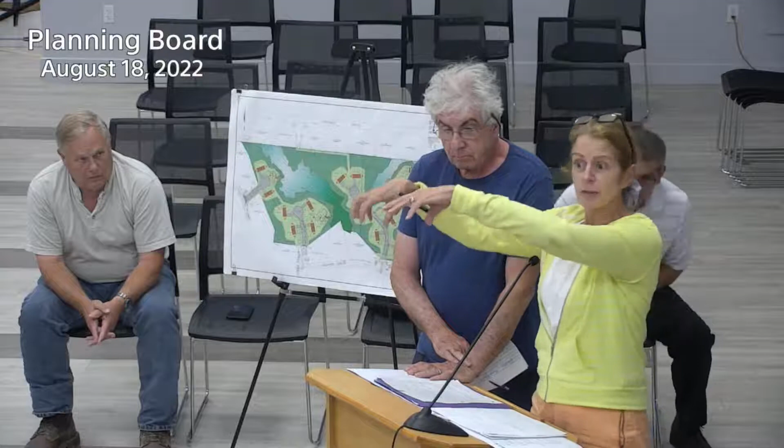Okay, Adria and Bill Lancaster, 504 High Street. So we're in Lot 6, and we would be in front of the house, one of the houses, or the house that would remain if it were just a one-house lot. The two of us would be, versus the other side, just so you know.

But I wanted to make sure, and I'm sure it would be followed, that everything that pertains to a scenic road is looked at and followed, and that there's attention given to the amount of trees taken down when that becomes either a road or a driveway, because trees will have to come down on either side. And the disturbance to the rock wall, because there is a rock wall on both sides of where you need to put the driveway, and I know you know that too. But if someone's driving by quickly, they may not see it, but they are there.

I guess those are the big ones for the scenic road piece, as well as, I don't know if you have anything to do with when the house gets built, but to keep in the spirit of a scenic road if you're on a scenic road — if it's an enormous home, that is not what High Street is all about. Just putting that there so I can note that I said it, and that we're aware of it, but I'm not sure how much control you have over that kind of thing.

Also, I apologize, I didn't hear what the police and fire had any concerns, or were they waiting for engineering? I got lost during the engineering read. We've got nothing from the police, they're gonna have to go shag that one. Oh, okay, all right, typically they don't say much.

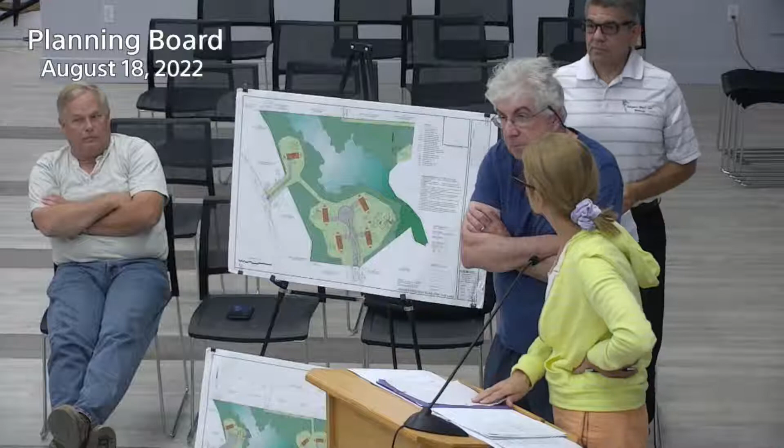Mr. Truax, if you can answer it. Are there any trees on the town property that you gotta cut to get in, or is a stone wall on yours or theirs, or yours or ours, I guess? Stone wall comes out of us, but I'm not sure what's out there for trees. I'll take a second look. I can go and take a look. So okay, you gotta take a look.

My suggestion would be, as you're doing this, we should probably do the scenic road here at the same time, so everything fits, and they'll make it right with the stone walls. The stone wall would put returns in, like we did in all the other ones. Oh, is that what you do? You just take the rocks and what's there, then put the returns coming in the road. Yeah, and if the stones are on his property, we can't tell him what to do, but they'll turn them in like they've done it everywhere else. 'Cause that's why everybody kinda likes living up there.

And the trees, we'll just take a look, there may be nothing, but if there are, you'll be notified for a scenic road hearing, and we'll do it in conjunction with this. They just can't go cut them, and then we decide what we wanna do. I'm gonna tell you, the problem with our scenic road bylaw, I don't like it, because you can cut a tree, but there's nothing in there that makes you plant another one to replace it. Oh, interesting. So sometime 50 years down the road, scenic roads, no trees.

How long have you been up there? 20 years. All right, remember they cut down some big oak elms that had disease and stuff? Yeah, the town came in and did that, cut them down, but they didn't replace them. So slowly it gets eroded on the town property. Maybe people plant them in their yard, but it's funny like that, is that there's no provision to plant what they cut.

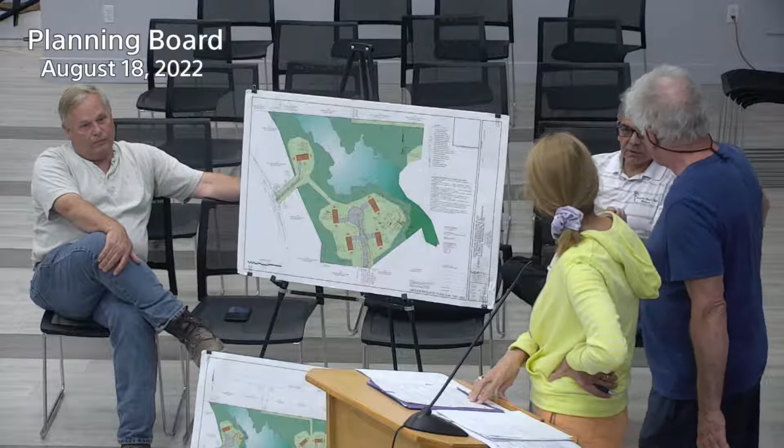They still have to go to conservation. So whoever builds a house on that lot, there'll be a public hearing, because they're gonna have to file with conservation. You'll get notified for the house construction, so whatever they're building, you'll get a chance to see it.

Oh, and that goes on too - I think these are trees, I'm not sure. So most of those lots are going to require notice of intent, public hearing, conservation commission review, and neighbors will be notified. You were talking about the other people up here discussing buffers with the trees and making sure that was part of the plan, because then they have to abide by that.

But I didn't know if that works here too, because that was one of our other concerns - can we somehow put something in to keep our trees on the other side of the property line, or right on the property line. They're gonna want to buffer you. I would think so, but you never know.

I didn't know how that worked with the other people, where you were kind of guiding them to put it on the plan, and the woman actually said no, we don't need to do that. But can you do something like that here? Probably the single biggest question tonight was the buffer between this new home and ours, because it's dense with trees now.

Is there any way to maintain the maximum amount with reasonability between the two properties? Well, put some stakes where the house would go, we'll look it over and see how far away it is, then we can talk about it - just where the house would go, so you get an idea of what it looks like out there.

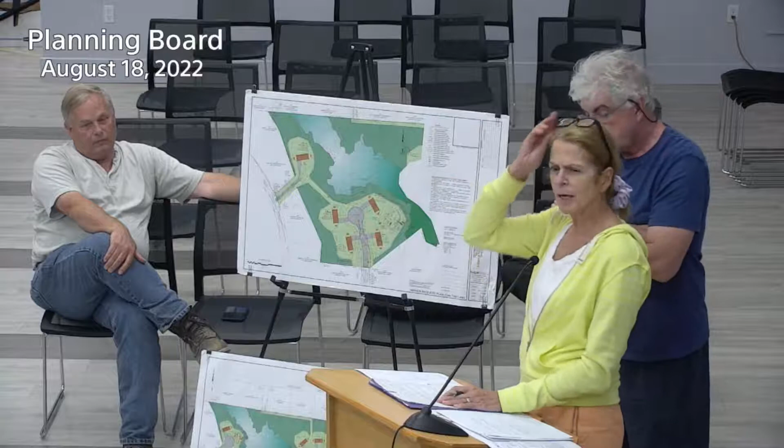That's all we have, but the two things were the buffering and the safety of coming out of the driveway onto the road. I would think the road has to be wider than the driveway - it seems like if we go to the fire chief, it's gonna get a little wider than the driveway regardless, and then the driveway would have to be even a little wider than typical.

It's just a nasty road, and to put another access road off of High Street - never mind just another driveway, because I've been counting the driveways in that section - we're just getting more and more of them. What I don't want to see is another fatal accident, like we had maybe 2 or 3 years ago. We were rear-ended twice recently. It's just nasty right now, but keep that in mind also.

While you're here, do you have any comments, like one house versus two? Oh my gosh, one. A shed - if you show it there, you can put it on the other side of the driveway. But I think there's too much wetland, which is another thing the Conservation Board will talk about too.

There's a lot of wetlands back there, and I don't know if it's expanded or not. Right now it's denser than I've ever seen in the 20 years we've been here, which is really nice to see since it's been dry. No mosquitoes this year - there's no water, but the ferns are growing, it's enormous, it's crazy back there right now.

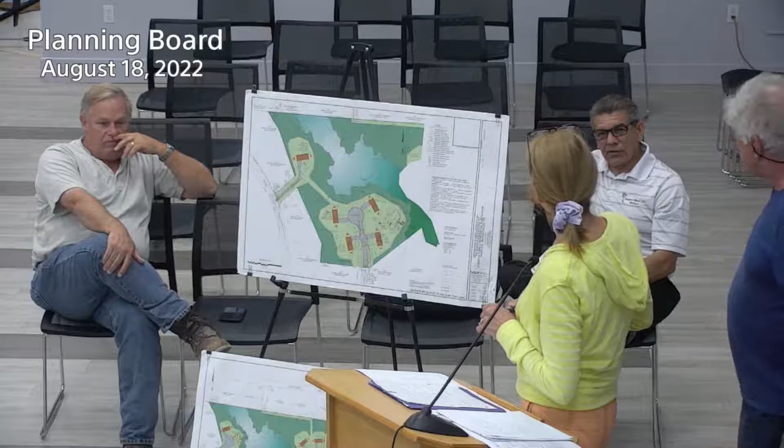It's pretty, but the design of the home is perpendicular to us. No, they can change it, it would probably face just how we have it. Right, you don't want to drive in the driveway and see the front of the house. So looking out our back, that would be the side of it. Yeah, that'd be the side. Sounds like it's right.

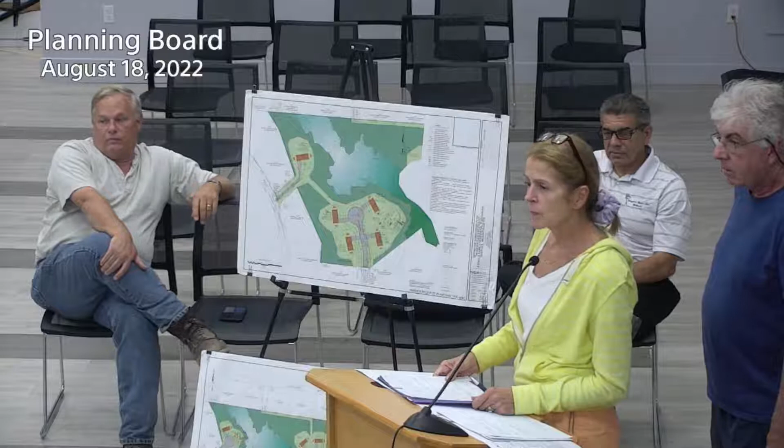One thing to note on the scenic road, what we'd be concerned with is the right-of-way within the town. So even though it's on a scenic road, we're not gonna be concerned with all the way up the driveway. Those trees, no, that's outside of what we would look at. So it's only like right at the road.

Well, I don't know what the line is, like we were talking about where the stone is, but they're taking care of it. So if it's determined to be within the roadway, we'd look at it and work with the applicant to make sure the stone wall is moved to another location. But there's no town control over the trees on either side of the driveway. Right, that's their lot. So the whole thing, you were getting sewer for the lot.

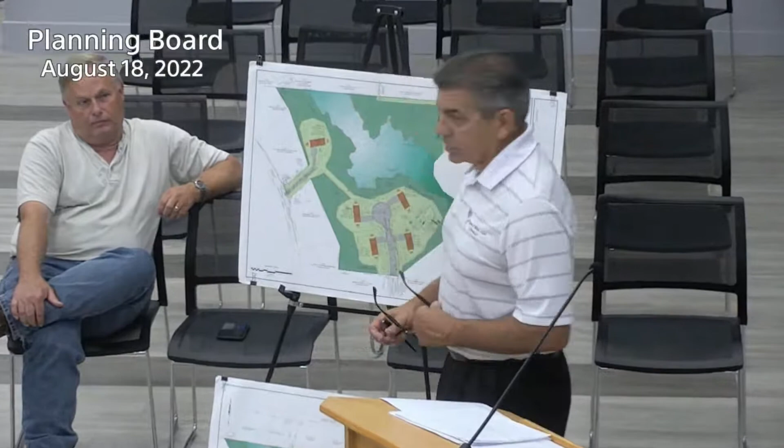The other thing that's gonna happen when you talk to them - ideally, I wouldn't even be opposed to getting rid of this rounding and pulling it back more, so it comes right to that corner. That gives them the ability to pull the house this way, that's up to you, and just get rid of that rounding. Then it gives the wetlands a little more open space here. I was trying to keep it that way as much as possible, so you can bring the house this way a little, give them more flexibility.

However you wanna do it, that's your call for that one. But just looking at the cul-de-sac there, that's your non-waivered frontage - correct. That'll be your official plan, it will be the frontage. So the guy, if he wants, that one house lot will have, the way it is now, almost 360 degrees of frontage.

Yeah, a lot of frontage actually. But it won't be enough for two lots. I understand that, but just so people understand, that doesn't necessarily mean the house can go there. If anything, it's not gonna go more to the left because there isn't the room, but it could come more to the right, it could go clockwise a little more - unless you condition it like that.

So if it's not a road, just a driveway, it's not a cul-de-sac. Is it there or just on paper? There will be what looks like a cul-de-sac - it'll just be a paper street, they call it. We won't be building the cul-de-sac in full width, but the lines will still be on the paper. It will look like a driveway, and you won't be able to build on it - no one can build where the paper street is.

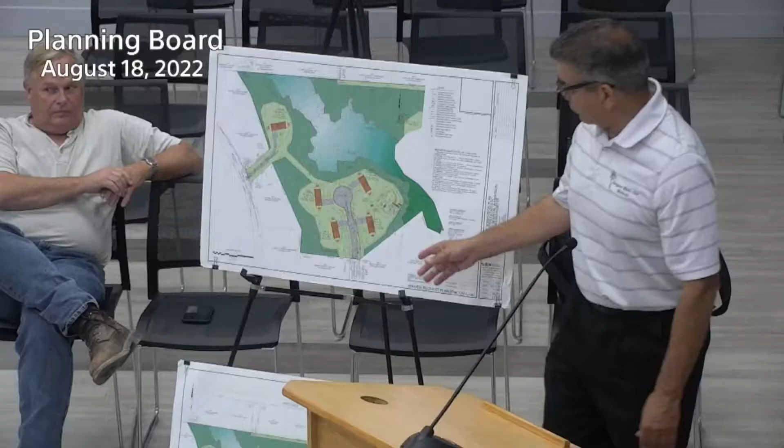But if the wall's not on your - it's half and half, it looks like. Looks like it comes off, it's off. With the driveway it probably wouldn't be an issue. We'll just do it anyway, just to be safe. Well what happens is you file it, we have it, and if everything's filed and it's not on there, then all of a sudden it is. Oh, that's fine. I'll get that in so we can have that on October 6th with it. And don't forget, you need a new name for a street.

Yeah, well maybe we'll - maybe a couple of minutes. You guys were here the whole time, weren't you? Yeah, can be a long night. All right, so that covers everything.